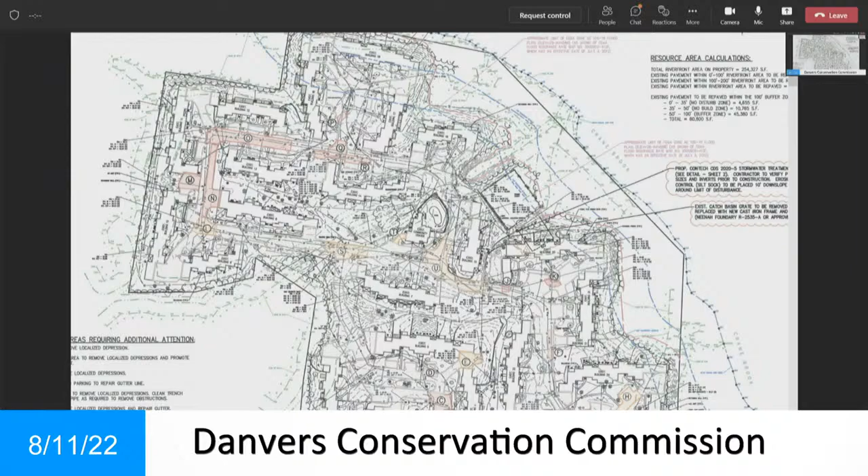So the only changes to the plan since you've last seen them are going to be the addition of a hydrodynamic separator in that area, and that's going to be treating approximately 45% of the existing pavement. Currently, there's no treatment. All the catch basins out there are just for conveyance. So we're actually going to be treating 45% of the existing pavement where there was previously none. And also, at the request of engineering, there's a damaged structure out there, so we're going to fix that, and that's in that same vicinity. It's just replacing the frame and grate on top of that. Those are the only changes, so I'll open it up if you have any questions.

Questions, I'll start with you, Chelsea. I don't have any questions at the moment. All right. Ann? No, I was good with this, yeah. Vanessa? Just clarifying that the revised plans have been looked at by the town engineer? I haven't sent the plans, but I've been in communication, and I've sent sketches before. We're going to be submitting the stormwater permit now, so he'll get a review of those, but with discussions, he was all set with all the proposed changes. Can you confirm that Steve King is all set?

Yeah, so Steve's okay. We don't have that in writing, but knowing how much back and forth this has had, the final sign off is all set. You have a verbal? Yeah, they've been here a lot. And then they will still, like he had mentioned, have to go through their permitting process. Yep. I'll say there's been a lot of scrutiny on this, so, yeah.

Where's Peter? I'm here. Peter, do you have any questions? Yeah, one quick one, or two quick ones, actually. Where is this replacement structure on the drawing that was just mentioned? I'll pull it back. Yeah, if you can pull it up, I can kind of point to it.

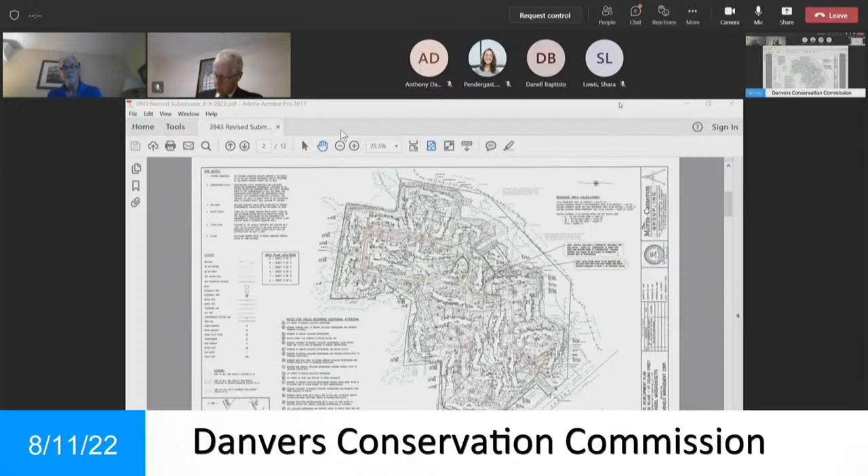Right. Okay. All right, that's the motion? Is that the motion? Yeah? Do we have a second? Second. All in favor? Aye. Aye. Aye. Very good. Thank you very much. All right, thank you, good luck with that project.

The next matter, number 2 on the agenda, is 41 Choate Avenue, DEP file number 14-1376. We've been notified that 41 Choate Ave has withdrawn its application, and we're going to take a vote on accepting the withdrawal to make it official. I'm correct on that, right, Georgia? Yeah. All right, does someone want to make a motion that we allow the applicant to withdraw? So that's what the motion is, to accept the withdrawal? Yeah, accept it. Okay.

I'll make the motion to accept the withdrawal of the notice of intent for 41 Choate Avenue, DEP file number 14-1376. All right, motion's been made. Do we have a second? I second. All right, and I don't think there's any need for public hearing on this. Out of curiosity, if we didn't accept this, what happens? Nothing really, we're just making a record of it in the minutes, so we know what happened. It doesn't prevent them from applying again. Gotcha. I see. Did you second? Yes, Ann. All right, all in favor? Aye. Aye. Aye, unanimous.

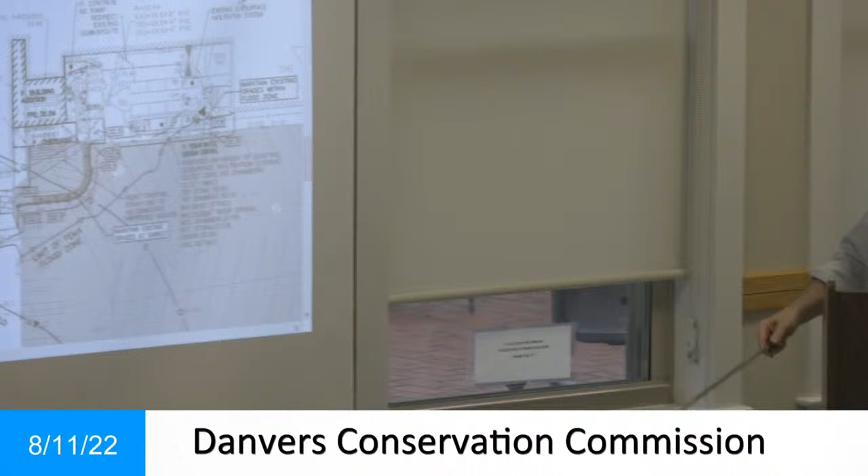However, the performance standard for work in the floodplain is no loss in flood storage. And where the work that we're doing is below the surface, we're not changing the grade above. There's no loss in the volume of the floodplain. So therefore, we meet the performance standard. What was the reason they pointed that out?

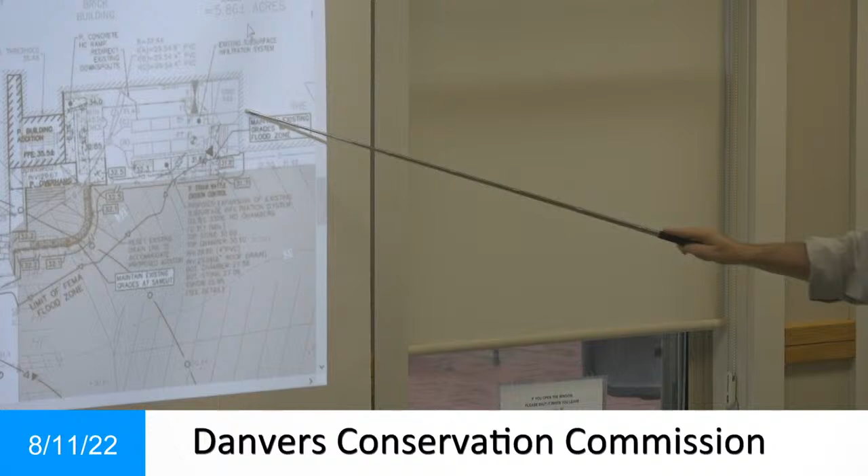They're not incorrect. That's the limit of the floodplain right there. And part of our proposed infiltration basin is technically within that floodplain. They probably were just bringing it to the commission's attention, because if we were changing the grade in that area, then we would not be meeting the performance standard. However, we're not changing the grade. Is this existing infiltration? The infiltration's not existing, the infiltration is proposed. Okay. The area of the floodplain is existing, the infiltration system is proposed.

But again, why does it not matter? Because the performance standard in the floodplain is strictly that there be no loss in the volume of flood. And because we're not changing the grade within the floodplain itself, there's no loss in the floodplain, and therefore we meet the performance standard. So that's why it doesn't matter. When you say loss of floodplain, what do you actually mean by that? Well, whenever you fill in a floodplain, you lose flood volume. We're not filling the floodplain, so therefore there's no loss in volume.

All right. Can I ask a question about the chamber being located in the floodplain? So even if you're not reducing the area available for flood storage because you're not filling, if the area was flooded, would that also flood the infiltration chamber, therefore rendering it over full or ineffective? Not really. The purpose of the infiltration chamber is to infiltrate, not for the 100-year flood. The infiltration chamber isn't set up to mitigate for anything that happens during the 100-year flood.

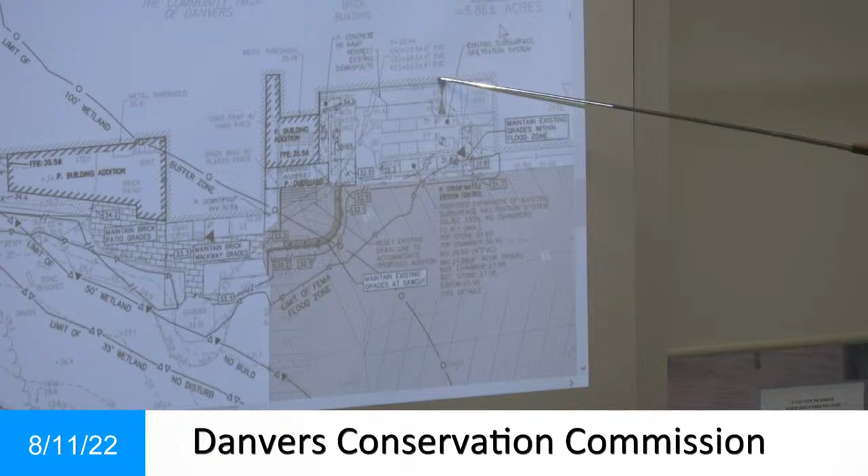So what we did, as I explained at the last hearing, we have 2 new additions. We're directing all of this roof, which now empties on the ground, and this roof. There's about 1,600 square feet of new roof area, but we're capturing, I think, 7,000 or 8,000 square feet of the old roof and directing that into it.

So we're greatly increasing the amount of infiltration and the TSS removal, although the roof water is relatively clean compared with the parking lot. Anyways, I hope I answered your question. Yes, thank you. I get lost in this stuff sometimes. I just want to follow up with that.

Sure. So the way this system performs, does it capture solids and does it hold them within the system? Yep. So those solids accumulate over time? That's correct. And then somebody has to scoop them out? That's correct. So if you got a huge storm, would that then cause the system to fail and all those solids would be released back out?

No, in this case, because it's rooftop. If this was collecting water from the parking lot, we would put on the front end probably a Vortechnics unit or some other method of removing the solids before it went into the infiltration system. Now, the infiltration system over many years, especially if it was collecting parking lot, some of those solids would get by the pre-treatment and get in there.

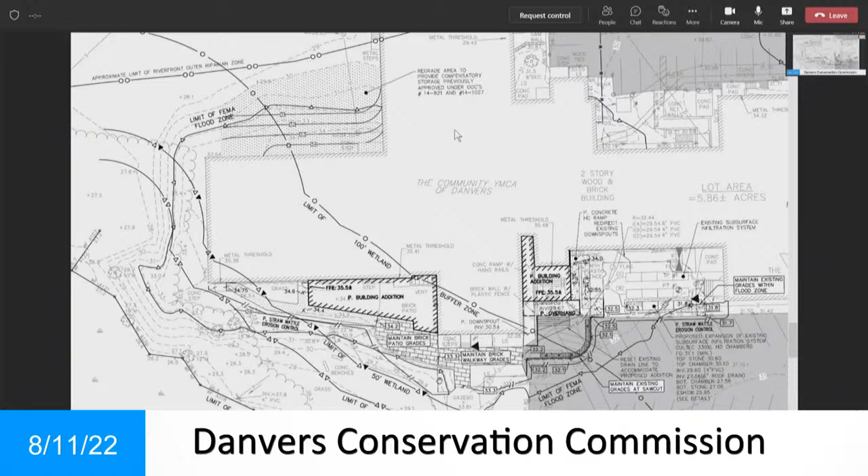In a couple spots, they clearly had washed out, and that's why this says maintain brick walkway grades. You need some sort of lip or something to retain those. Yeah, they've been there for 17, 18 years, so sometimes things need maintenance. But your point is taken.

Okay, and then just refresh my memory, Charlie, please. One of the certificates of compliance we approved the other day was that back corner of the pool where they were going to remove some fill in order to make additional volume for the floodplain. That's correct. What was the other certificate of compliance? It was actually for the gazebo and the bricks we were just talking about.

Oh, okay. All right, so when they put that gazebo in the brick patios, they had an order of conditions for that as well. Okay, all right, so that has to be done then. Okay, good, that's all I have. Thank you. All right, and are there any waivers requested in this? There were no waivers. No waivers. All right, and everybody's had their chance to ask questions.

I just have one more thing to follow up. Go ahead. Georgia, did we talk previously about possibly doing a performance bond on this? Because we had said there were like 2 times that the flood storage work wasn't done, and we gave them the COCs, and then we said, well, what if it doesn't get done this time? Had we talked about that? I believe we did. Okay, so if the rest of the commission feels similarly, I'm interested in the idea of a performance bond to make sure that the flood storage work is done.

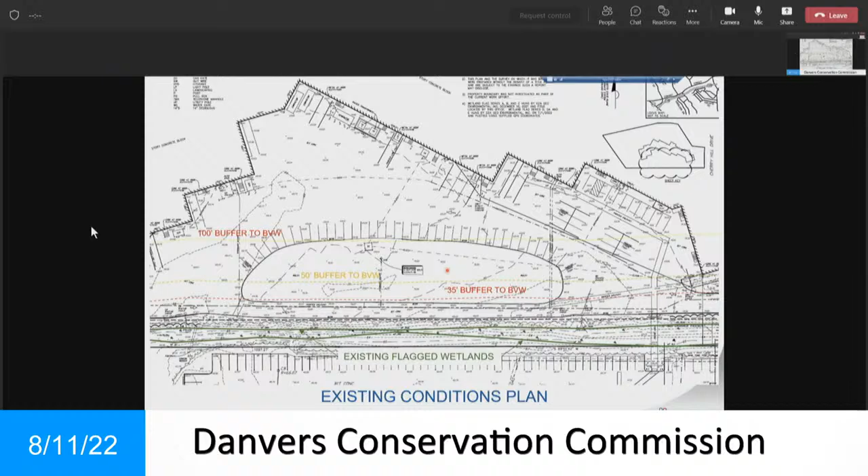Our erosion control plan. I think the key point of this plan is pretty much to identify that we are in compliance with the regulations given to us in the zoning bylaw relative to color schemes. The erosion controls are brown as requested, and the 35-foot, 50, and 100-foot are as indicated on this plan. I just want to bring attention to that.

The erosion control is laid out in a fashion to prevent construction debris and silt from entering the resource area. It covers the entire limit of where we are proposing to do construction. The intent of these siltation barriers is just to allow flow. It's not an impermeable barrier, but it's to allow flow but retard any solids and act more or less like a strainer, if you will.

There are construction entrances with stone track pads to prevent debris from being tracked outside of the project as well. As you can see, the siltation barriers are located on both sides of where we are proposing our new footbridge to retard siltation as previously discussed.

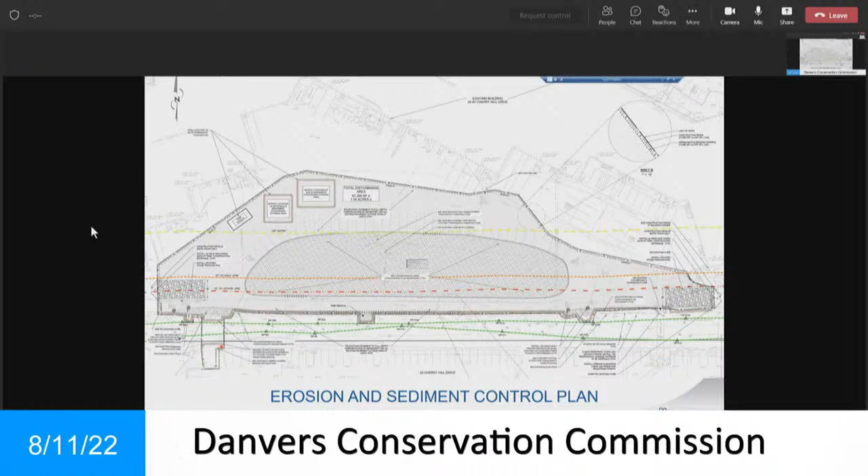This is just a quick overview of what we are proposing from a layout standpoint. I won't spend too much time on this sheet, but we're providing parking. We have included landscape areas within this footprint. We have extended green area within the 35 no disturb. We have our proposed footbridge to the bottom left. Here is our existing footbridge to the right.

Just want to bring your attention, the existing stone dust path was under a previous scope, and it actually terminates in this location. We are picking that up and bringing it across the back of the proposed parking area and flowing eastward to have a contiguous path from where the existing stone dust path terminated, which is right here, this location. We have an inset to the top right that I'm going to talk about in more detail on the next slide.

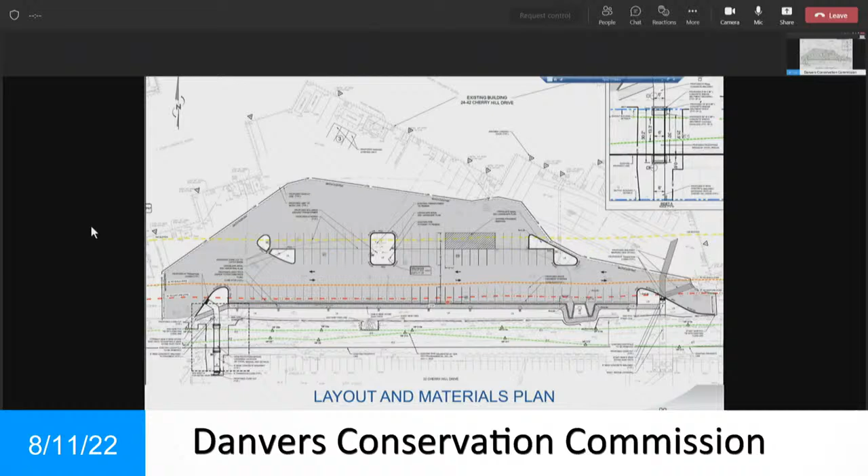So here's a zoomed in version of our proposed bridge construction. To the left, we have a site layout with some descriptives and dimensions. To the right, we have a grading plan, and I'm going to go in order from left to right. The key point of this blow-up sketch is to give you an idea of what the bridge abutment entails, and to emphasize that the bridge abutment, which is where I'm tracing now, is an 8 by 22 foot bridge abutment. And within this abutment is where the superstructure rests on, if you will.

It is to be noted that this superstructure is outside the limits of the wetland bank, which is depicted in green here. And from a performance standpoint, the bank full width, which is 13 feet, which is the most restrictive distance, this is the widest portion of the bank, is less than what we're providing. So essentially, we are exceeding 1.2 times the amount of the bank width.

So we're proposing 21.9 feet from abutment to abutment. That's designated by this dimension here. And the bank full width is 13.3 times 1.2, which is 16. So we have a little chart here stating that we meet that performance standard.

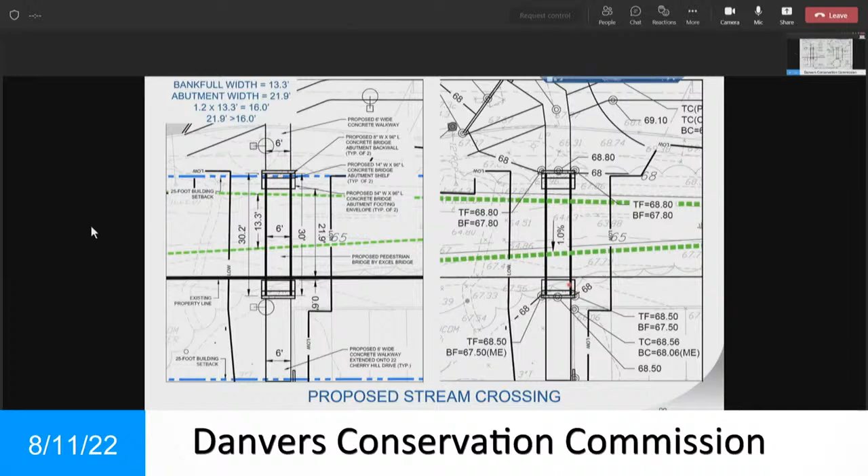This is the grading plan. I'm sorry, the drainage plan. I'm going to talk briefly about just the hydraulics and the intent of the drainage system as it affects the board and the resource area. So based on MassDEP standards, there's 10 standards. And part of the standards is to provide TSS, total suspended solids, and water quality treatment, along with recharge. And this facility does all the above.

We have installed 2 catch basins, 1 catch basin here and 1 catch basin over here. The treatment train is exactly the same. It's just going into 2 different subsurface contact units. So, pretty much the water will flow in this catch basin. We'll enter what's called a diversion manhole. The intent of this diversion manhole is to divert the flow into an isolator row that will provide treatment; excess flow beyond what this isolator row is designed for will bypass and go into the primary treatment system, where it will get additional water quality and provide recharge to rehydrate the underlying soils.

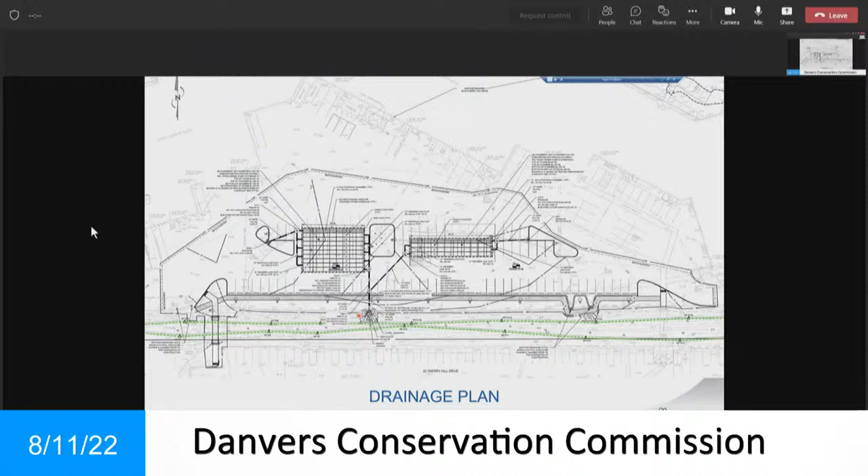This plan is set up so it's staggered, where certain features and buffer zone and jurisdictional buffer zones are highlighted. For example, we have the 35-foot no-touch zone. We have the 50-foot no-build and the 100-foot jurisdictional buffer zone. This area was flagged by GZA, and I'm going to hand it over to him to go to specifics on flagging, how it was delineated, and provide some more feedback from a delineation standpoint. Dan, are you there?

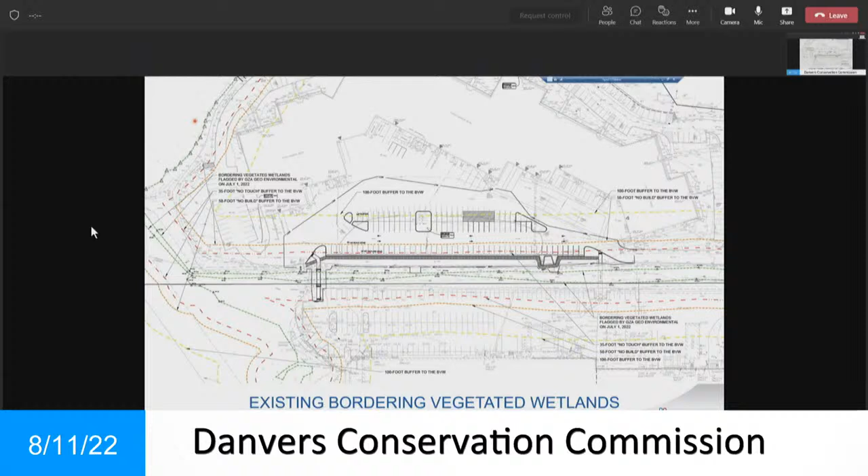Actually, Anthony Damiano representing GZA tonight. Oh, I'm sorry. Okay. But I was the delineator on site. I did the entire site, including what's up into that top left portion there that's outside of our limit of work. But I was on site to conduct the delineation, and specifically where our work is, down along this drainage feature that Danelle's been referencing in green, is our main focus this evening.

The flagging, I know there's a question about spacing there. It's typical for GZA practice to hang a flag every 40 to 60 feet, and especially when there's for the most part a straight feature, then we'll end up hanging flags in this type of spacing. And as Danelle mentioned, the bank full width. I don't know if there's any other questions about that, but all of that was well described. I don't have anything to add there.

And as far as the work area goes, Danelle covered for the most part where we're working. Within the buffer, that's unavoidable in this case; we're putting our work area within these buffers, looking to make improvements to that buffer zone, as well as installing this bridge over the resource area, but again, not within that resource area besides the buffer zone. That's all I have to add, unless there's other questions, but I'll turn it back to Danelle to wrap up.

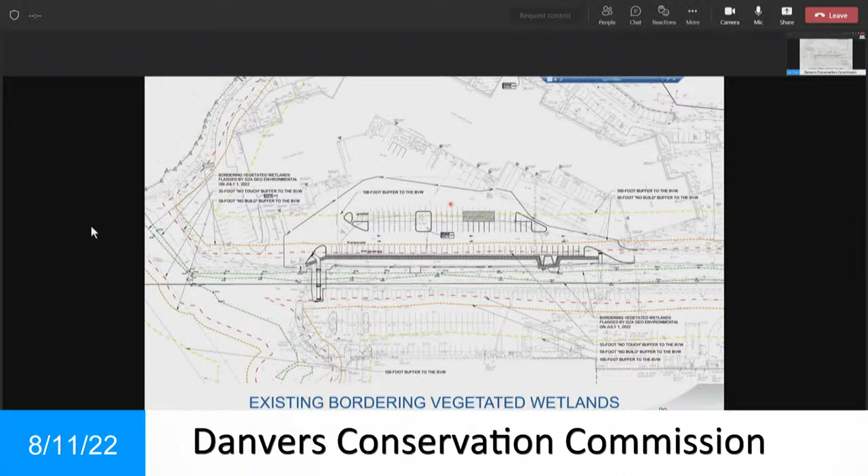So just to provide more transparency and to get a better presentation of what's going on relative to disturbances, this plan was set up to identify disturbances, temporary disturbances, and it's set up in a color code fashion. And I'm going to be flipping from the next sheet and coming back to this sheet. That way you can see the numbers, and I could go in a little detail, and we could go from there. So if you could bring your attention to this color code fashion, I think it was done for the end user to easily read and understand what's going on here.

I'm going to start with the red. So based on our local conservation wetland bylaw, we are only allowed 10% of the total area. Disturbance within the 35 foot, we're only allowed 10%. And as you can see, the 10% is what's allowed. We are proposing 8,900, which is 8.7%. So we're in compliance.

Separate regulation is for disturbances within the 50 foot, and the totals are 141,000. 20% of said number is 28,350. And as you can see, we're proposing 17,000. So, obviously we're under 20%, and hence we meet that threshold here. I'm gonna jump back to the previous plan, just so I can see.

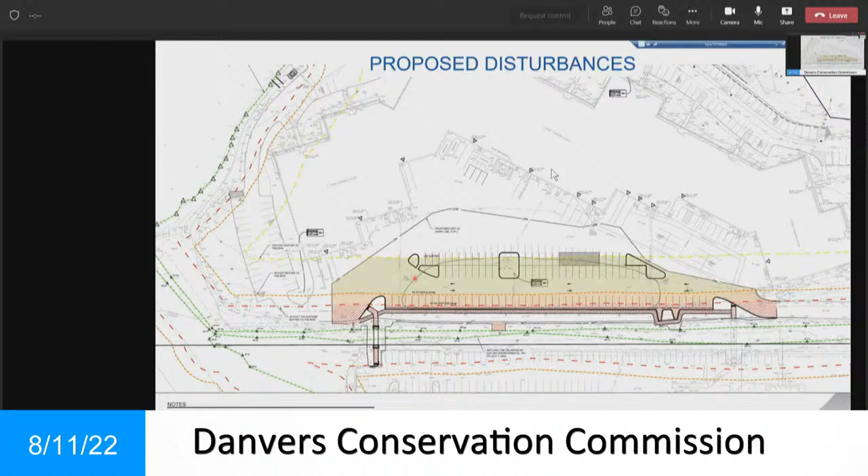Can I stop you for a second on your chart? Sure. On page 2, it says allowable disturbance, 28,350 square feet. And then it says proposed disturbance, 25,230 square feet. So is that? You have the old memo, Mike. I think you're looking at the wrong one. Is that the wrong one? That's the old one. 17,000. Okay, so was this just wrong?

No, they updated it after discussion with staff. I think Danelle will probably get into it, but they had mistakenly included temporary alterations in their calculations. I was wondering why that number was so high. And I was too, and then I worked with the team and said, I think you included temporary alterations. Okay, this clears that up. Thank you. Go ahead. That's correct. Thanks, Georgia, for putting some clarity on that.

Just like Georgia said, what's in white, and I have a footnote here, the shaded areas in the 35-foot and 50-foot depict permanent disturbances. And these areas not shown in the buffer zone are considered temporary. So anything in white, we are doing work in there, but it's green area. It's not anything permanent. So I was double counting that, and Georgia brought to my attention that you don't have to include this in your calculations. Hence why we sent supplementary documents that were accurate based on the local town wetland protection bylaw.

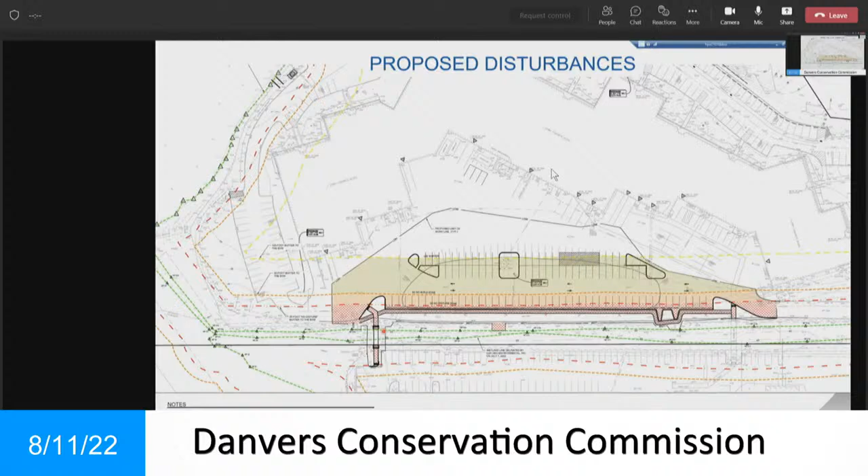Also, in our calculations here, there's a provision that allows 10% or 50 feet of alterations within the bank, linear feet wise. We are actually disturbing less than 50 feet. So from a performance standpoint, we are all set on that as well. Just want to bring that to the attention of the board. With that 50-foot number, are you talking 50 square?

Well, on behalf of Abiomed, this concludes our presentation on the notice of intent application for the parking lot. I do want to mention this. I didn't mention this in the beginning. The whole intent of this project is to seek an order of conditions. As part of that order of conditions, we submitted a waiver for disturbance within the 35-foot buffer zone and work within the 50-foot that was submitted as part of the original NOI package. So we're asking the board to kindly review that and allow us to work within limits that are not allowed by the town.

Thank you. Just back up a minute. When you were talking about the 50-foot, the allowable 50-foot area of disturbance, were you talking 50 square feet, or what were you referring to? The 50-foot no build. Oh, within the 50, okay. Right, and we have a permanent structure within that area. All right, fine, thank you. No problem. So if the board would allow me to open it up for questions. Us, the team, Shara, and whoever's here would be more than glad to answer your questions.

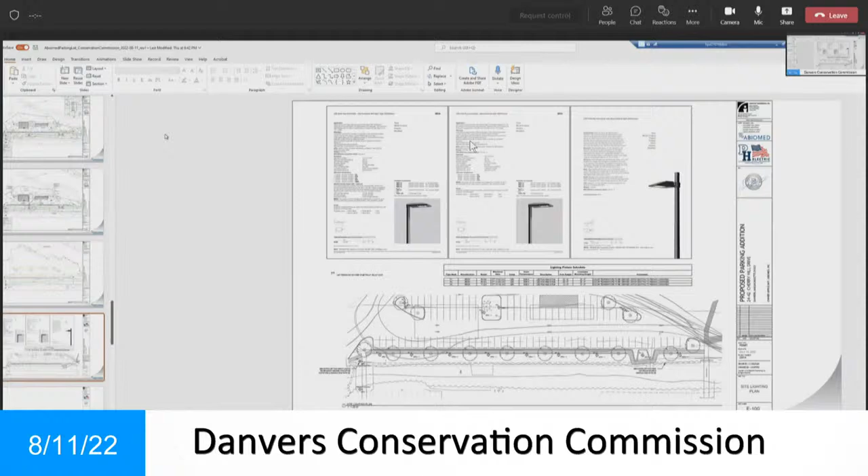Mr. Chair, could I just interrupt for a second? Sure. So the plan I have in front of me, a landscaping plan submitted with the supplemental materials, shows trees that the plan you have on the screen right now is missing, if you go back one page. Yes.

Between the time we submitted and now, Abiomed had wanted to eliminate some of the trees along that path. They're not existing trees. They were newly proposed trees, and so Abiomed wanted to take out some of them, so we've shown them removed. But if the commission has a certain quantity of trees that you need to see, or just desired, we would certainly be open to hearing what is required.

Well, I would note the landscaping plan has substantially changed. You're not removing trees, but what was going to be added is no longer there. Same with the landscape islands. There were almost 140 grasses proposed on the site, and now they look pretty bare. So that would be my comment to the commission if they wanted to require landscaping. I'm not sure of the reasoning for the shift from the first plan to the second. What is the reason? Mike Hood, do you want to speak to that?

We will work in concert with Georgia if the commission allows us to, and then we could provide a new or supplementary landscape plan that meets the town's requirements. Particularly important on a bank because grass doesn't have very deep roots. You're gonna want plants that have good, deep tap roots and stuff that'll actually stabilize the embankment.

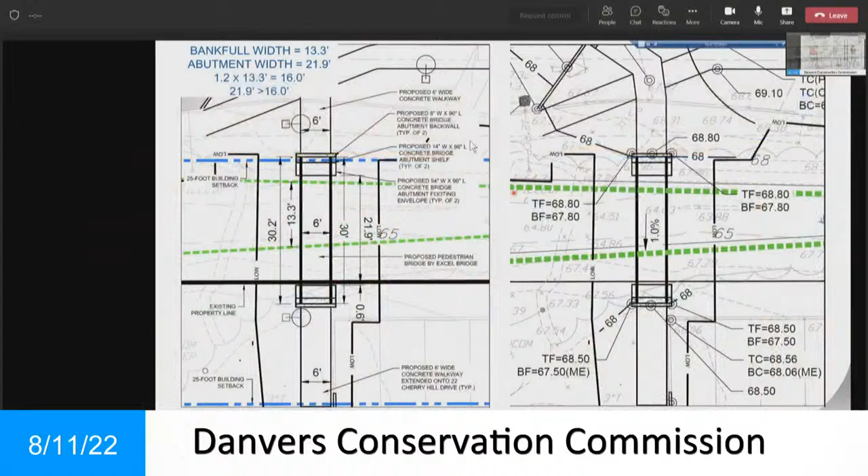Okay, so let's get back to, are you done with your questions, Vanessa? Did you have further questions? I think I'm good for now. How about you, Ann? I had a question about the bridge. Are you constructing the bridge on site, or are you bringing in a bridge that has been built elsewhere? I can comment on that. This is Shara again. The bridge is just like the last bridge, the one that's there now. This is being constructed in California by Excel Bridge and brought in two pieces, and then it gets assembled on site, and then the concrete deck gets poured on site. Okay, good, thank you.

The intermittent stream, where is that located? That's where the bridge spans. The bridge spans and it's down below there? Okay. It's between the two green wetland lines. The two green lines is where it runs inside there. Okay. And how will the stream be maintained? So during construction, the stream is gonna have erosion control measures put in place. The stream and its channel won't be hindered or altered. So if it was flowing as it is in the existing condition, that will be maintained during construction. It wouldn't be obstructed or prevent the flow. If that answers your question. All right, thank you.

Peter? Yeah, I don't see snow storage shown anywhere on the plan. Where do they plan to store snow so that it melts? That's a good question. We'll coordinate with Mike. You want to address snow storage? Yep. What we've been doing the past couple of years with the growth and everything, we've been actually hauling snow off-site. Good, that's good to hear. We just don't want to have snow placed on top of this reclaimed area and just having surface runoff into the wetland area. Okay, that's good.

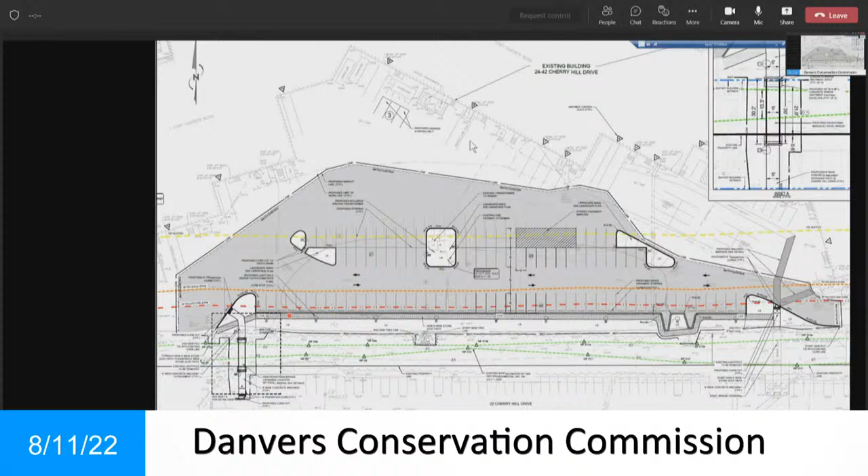And maybe I'm getting ahead of myself, but we need to vote on waivers on this, correct? Yeah. Correct. Well, are there more questions? I do just want to note, sorry, Peter, to your point, the new plan provided does say the whole grassed area is going to be snow storage. So I would either suggest the commission have that note eliminated from the plan or condition that all snow is not stored there and is removed off-site. Okay, good. Thank you, Georgia. That's a good catch.

I'm all set, Mike, if you're waiting for me. You're all set? Anyone else? All right, well, I don't think I had, well, was the question answered? Is that a prefab bridge that's coming over? It's answered? Yeah, it's gonna be built in California and comes in two pieces. Okay, very good. I have no further questions. So, any public comment? Nope, and we don't have any online. All right, and then I think we should move to close the hearing.

Mike, before we do that. Yes, Peter. Do we have consensus on what Abiomed is going to do with revised drawings to show that it's not a grassy area and that it's more natural, non-maintained type landscaping? Could I answer that? Can I jump in? Sure. So we could provide a revised plan mid-next week at the latest with all your comments, provided that we have communication with Georgia, just to make sure we're on the same page. We could turn that around in less than a week, if the board allows us.